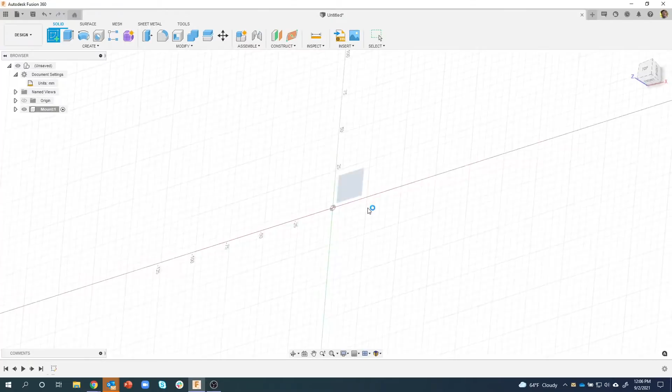Okay, so I'm going to start making sure I'm in millimeters, and like you should always do, I would recommend creating components. So I'm going to say new component, and I'm just going to call this one mount. So now I have an active component. That allows me to create a sketch, and I'm going to show some tips and tricks as we go through that might speed up and save some time for you.

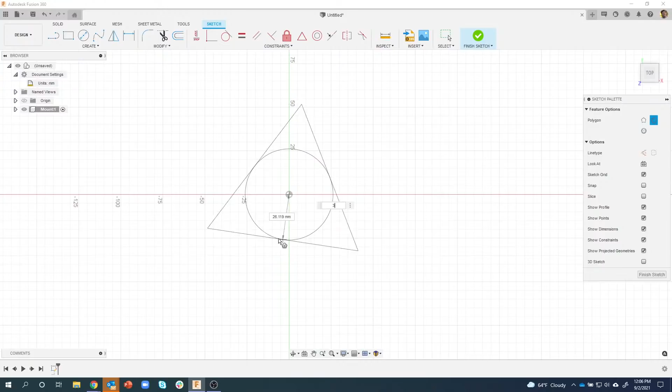So I need to create a polygon or a hexagon. You can see right here, polygon, circumscribed polygon. I'm going to go ahead and click right here in the center. You can see this number 6 right here. It allows you to specify the number of sides. For example, here's a triangle, but I'll put it back to 6. And I'm going to get the top line sort of horizontal, but not quite.

But what I do care about is the overall radius of this. So I'm going to say I want that to be 25. I'll hit enter. Now you'll notice it is not fully constrained, but as soon as I come in here and say let's make that a horizontal line, it is now fully constrained. Okay, so here's one of the tips.

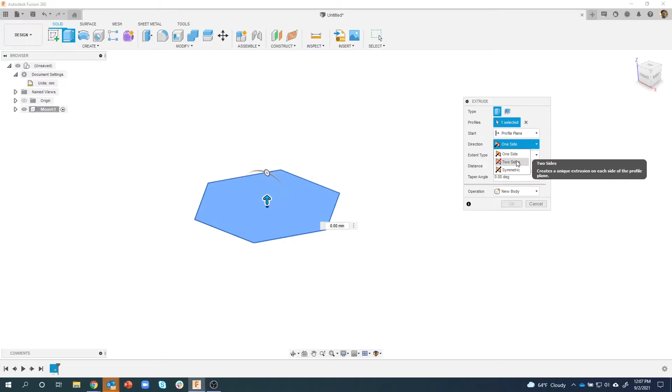I'm going to extrude in 2 different directions. I'll move this in case some of the video stuff is covering it up. By default, it's usually set to one side. I'm going to come in here and say 2 sides. And what this allows me to do is I can drag down, for example, and we can see that distance right there. And then I can also drag up.

Now, why am I doing this? Well, it's going to keep my origin where this blue plane is. And that's going to make it much easier when I go to create the profiles for the metal inserts. So I want to go down 5 millimeters, and I want to go up, I think, around 28 millimeters.

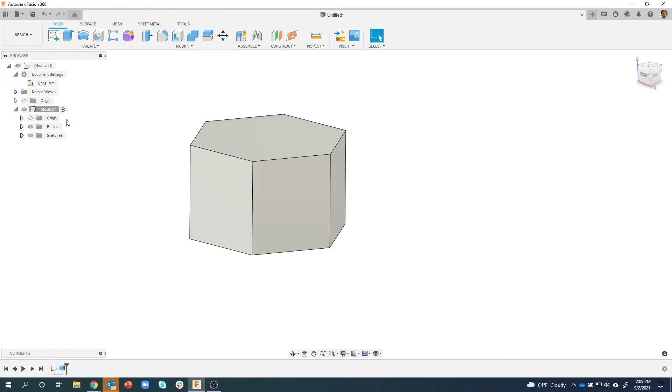And you might be thinking, how would you go about creating these little standoffs or these little arms? Okay, so using the cube kind of as reference, I want to create a sketch on this front face. So I'll pre-select it, create my sketch, zoom up here just a little bit, and here you can kind of see why I did that extrude in two different directions. Notice where my origin is, and we're basically going to create all of the stuff above this, and I have enough material down here for the stability of the part.

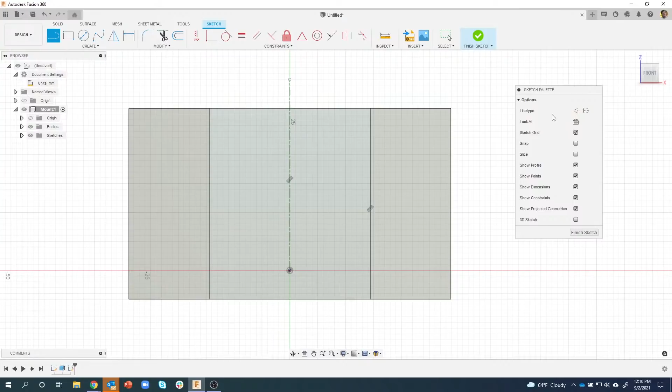So I'm going to create a line, and hopefully you all know this. We recently added a new line type in here called center line. So I'm going to do center line. I'm just going to click at the origin and drag straight up, like so. Then I might create another line, but this time I'm going to do just a construction line that goes across. That way I can kind of reference that line if necessary.

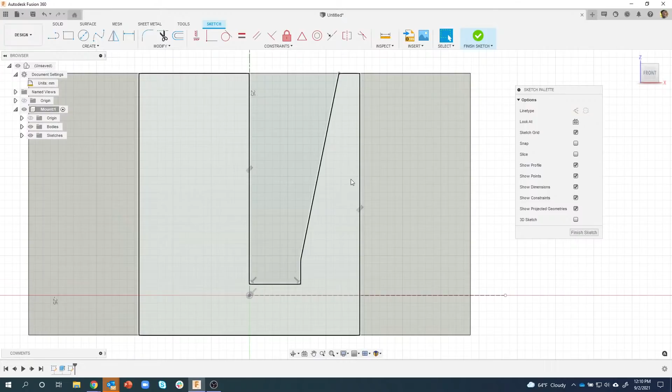Then I'm just going to kind of mock up what the groove is supposed to look like. And again in the outline, oops, and I want to make sure I'm in the regular line, I give like the shape of the profile, and that's kind of what I'm following here. It's just something that kind of looks like that. This is kind of the opening. Then I'm going to start to create the dimensions for this to tie it down, because right now you can see that it is not fully constrained.

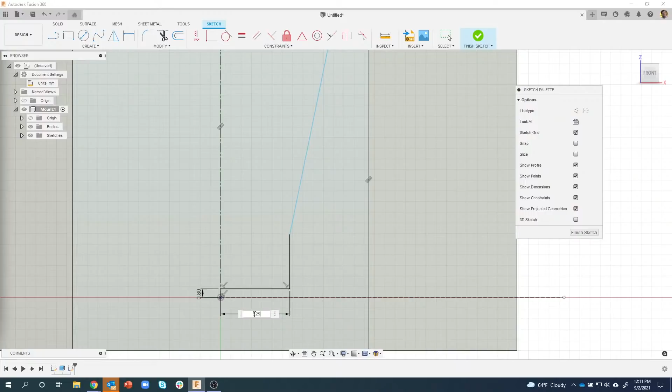So I'll throw a dimension maybe here, and that's supposed to be 3. Maybe I'll throw a dimension from here to here, and that is supposed to be 0.8, I think. I need to throw my glasses on here. I'm looking at my outline real quick. Yeah, 0.8. And you can see as I'm starting to do these dimensions, it starts to constrain the sketch. So 6.25. And then finally this little length right here is going to be 2.4. And again, these are millimeters, so they're fairly small measurements.

So I get that particular shape, and you can kind of see that's, let me line things up, that's kind of that angle right there, and then the vertical line going up and down. Okay, so that's kind of what we just created. Then I'm also going to use this sketch to create the slot for the metal that's going to be slid into here or held into here. Actually I think I'll get to that in just a second. I'm going to draw a profile here.

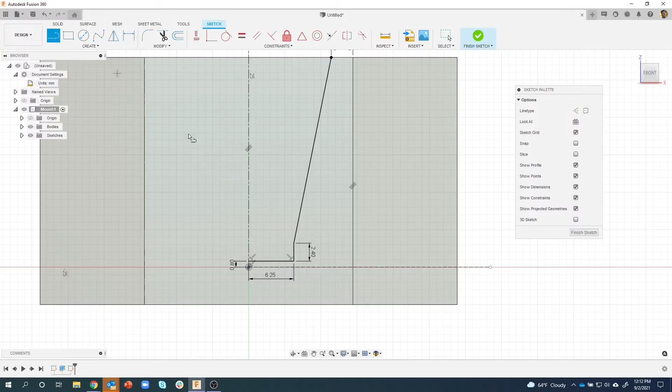And here's a cool tip. So notice I have these dimensions here, and I also have these constraints. I can come over here and turn off show dimensions and show constraints, and it kind of cleans up what this is going to look like. So it's not so cluttered as when I had all this stuff on here. And we'll come back to that here in a second.

But now I'm going to draw another profile, just kind of mocking it up. So I'll come over here, draw vertically a little bit, kind of come at some weird angle. Again, just kind of guesstimating what this is going to look like. Let me purposely make some changes here. I'll do that, and I'll do something like that. Okay, so you can see some of it is constrained and some of it is not.

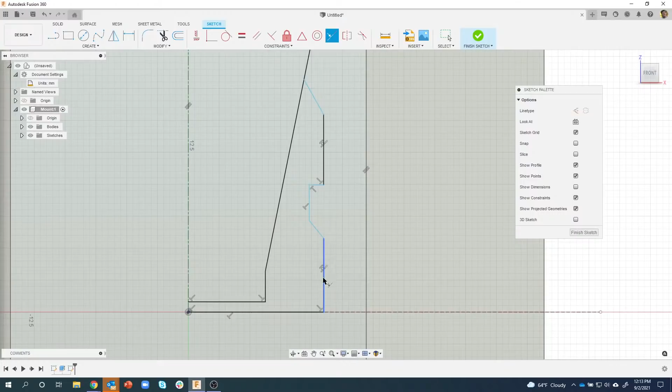What I'm going to do now is use dimensions and constraints. So I want these two lines, this line here and this line here, to be lined up with each other. So I'm going to make those collinear. So I'm going to say that line and that line need to be collinear with each other. I want this line and this line to be parallel with each other, so they're pointing in the same direction.

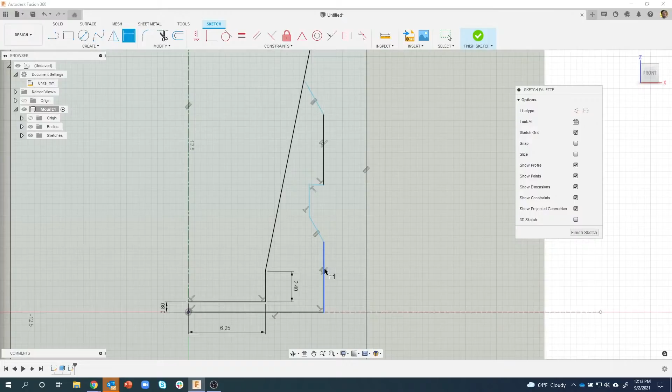And then I can tie down with some dimensions. So I'll go ahead and hit the show dimensions again here real quick. Type in some of these dimensions. So let me go ahead and type in like 3.5 for this guy, and you can see how that changes slightly. We'll do dimension 1.2. I'll make this angle 135.

So I'm just kind of tying down everything, fully constraining it, so you can see how that updated that one there. We'll make this 0.4. So the only thing that's left is this blue line right here. And again, here's a tip. If you don't know why it's unconstrained, I just click and drag and I can see, oh, it doesn't know the height of that line, because I can move that line up and down.

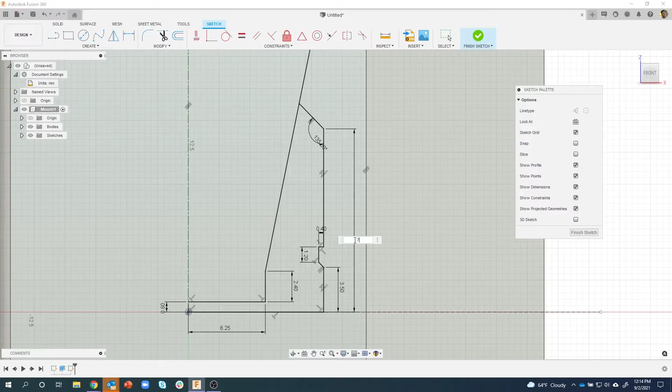So let's throw a dimension from maybe here down to the very bottom, and we'll make that 7 millimeters in this case. So now we've tied a bunch of this down. I'm going to go ahead and make sure that looks good. That looks good. Okay. I want to add one more dimension. I'm going to go from here to here and do 1.2. Okay, there we go. That looks a little bit more like what I was looking for.

But notice how crowded and complicated that whole thing looks. And this is where I turn these guys on and off. They didn't go away, they're just hidden. And I can see this profile much better than when it looks like that. So hopefully you guys know that tip.

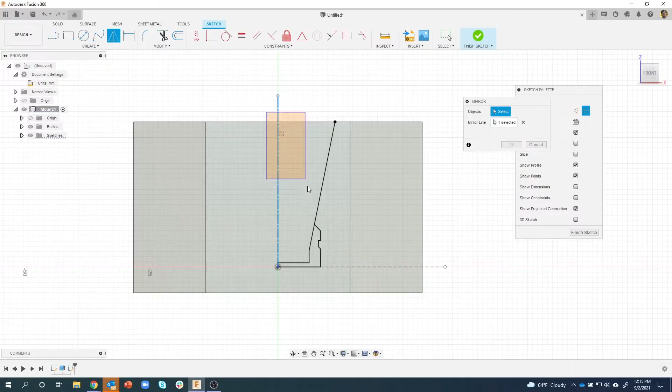Now I want to mirror this to the other side, and this is one of those tips that I did earlier. I created this as a center line, so watch what happens when I do my mirror. Notice it says mirror line 1 selected. It automatically selected that for me, so all I have to do is draw a box around what I want to mirror, and that's that geometry right there, and I'll say OK. And it automatically mirrored for me. If this was a construction line, I would have had to say, this is my mirror line.

Okay. Looks like I have somebody helping out on chat. I really appreciate that. Hopefully it's Jason. So if you have any questions, whoever's on chat will hopefully help you out. So thank you. Okay.

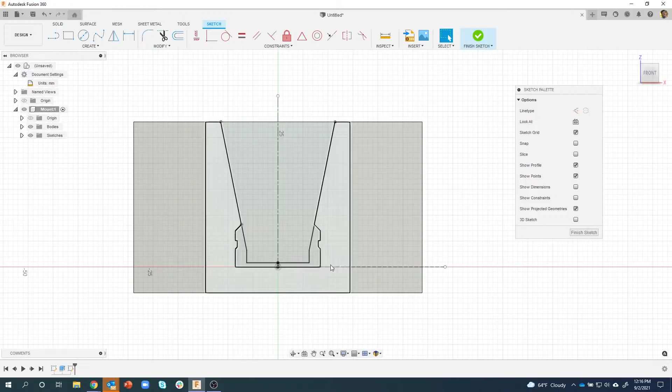So Stuart asked a question I just glanced over. Why was the profile black? Yep, it is Jason. Woohoo, yay. Why is the profile black before I added that last dimension? I'm not going to undo, but it was because of this line down here. It wasn't fully constrained. I hadn't given that a dimension yet, but because this line was on top of it, it looked black. So once I put this dimension in here, this 1.2, that's when it fully constrained the sketch.

And if I take a look, let me go finish sketch. And now I have this profile, and I could have done it as 2 separate sketches, but because it's on the same face, I created it as one single sketch. So I'm going to select the profiles that I want to extrude. So I'm going to grab these, right click, and it shows me the command that makes sense.

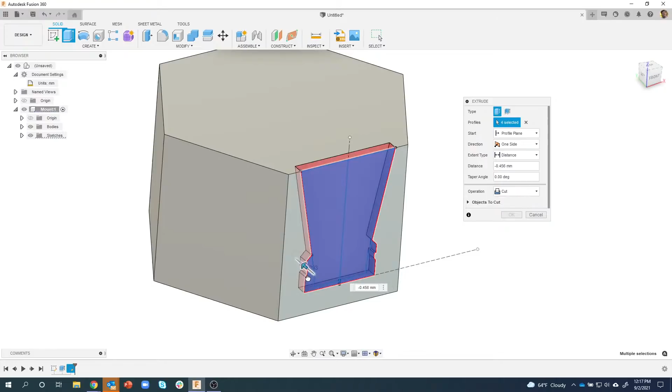So I'll say extrude. We'll drag backwards a little bit to give it the direction that we want. And then I can specify how far. In this case, I can see it's a negative number, so I'm going to type in minus 10 millimeters. I'll say OK. And we've created this particular shape.

Well, I want to reuse my sketch, and by default, it gets turned off, which is a preference. You can go into your preferences and say, do not turn off my sketches, but it just helps clean things up. Typically you're only using a sketch once, so that's why we have it set that way by default, but I can always come back and turn that sketch back on.

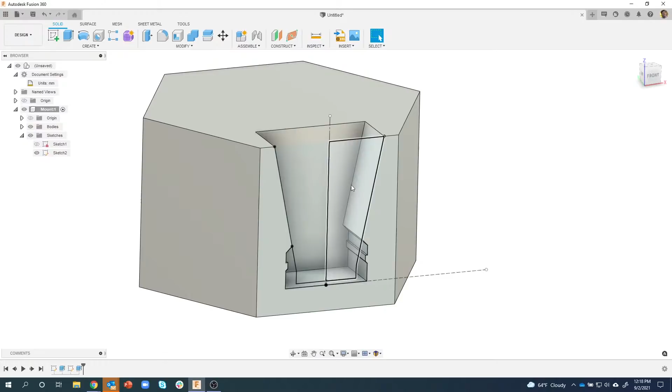Now I want to remove a lot more material, so there's a lot of room. So I'm going to come in here and grab these profiles again, just these two, right mouse click and say extrude.

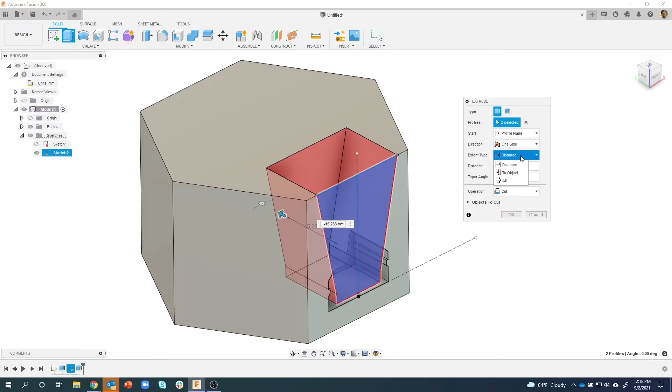Now I want it to go exactly halfway into the model, or basically to the center, but I don't have a point there. But check this out. Instead of distance, I can come in here and say to object. And usually when we say to object, we're clicking on a face of a single part or another part, but I can actually come over here and click on this point, and it's going to extrude back to that point. So you can kind of see how that's lined up.

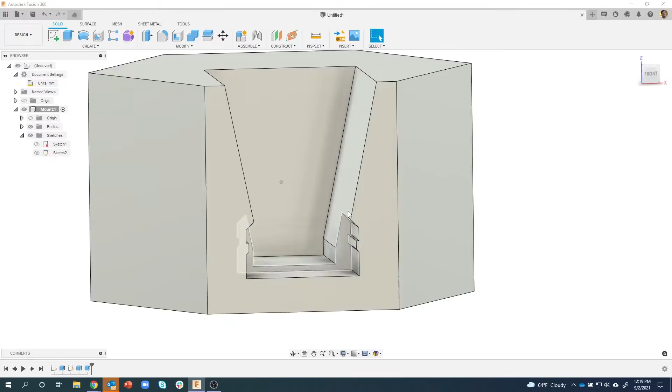So I'm basically specifying that as my distance. So it's always going to go to the center of this hexagon. And I'll say okay. I'll turn my sketch off just to keep things looking nice. And there, in basically 2 sketches, I now have an area for the metal to slide in and stop against, and then I have this big void.

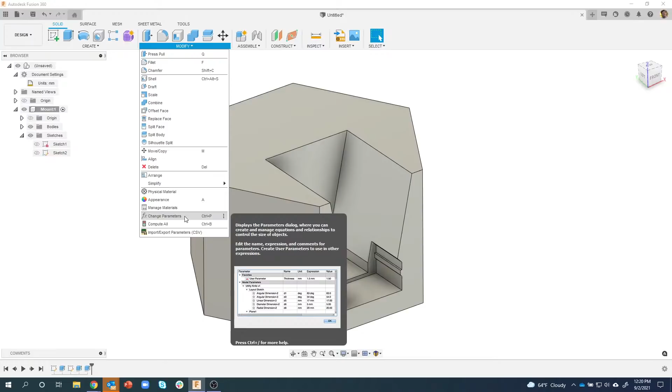Okay, here is where some forward thinking comes in. So in this example here, it has 6 arms. Well, what if I wanted it to have 3 arms or 4 arms or something like that? Well, this is where I'm going to create a variable or a parameter. So I'm going to come in here and say change parameters. And what this is showing me is right now I have model parameters, and that's it.

If I expand this open, let's just do this first extrude. We can see those 2 distances that I specified, the 28 and the 5. I could expand open these sketches and see all the dimensions of these sketches. But what I'm going to do is actually create what's called a user parameter. So I'm going to come in here and let's call this number of slots.

Now it's not a measurement, it's a number. So I'm going to come in here and say no unit. And I'm just going to scroll through here so you can see we've got a ton of different units in here. So angles, currency, mass, percentage. There's just a ton in here that you could use. But I'm going to say no unit, and let's default to 6. And I'll say OK. And I now have a user parameter.

In fact, I could say this is one of my favorites. I'm going to click on that little star, and you can see it puts it up in my favorites. So when we go to do a pattern, for example, we're going to reference that. So this is where the magic happens. Instead of having to type in or change whatever, I'm going to come in here and do create pattern, circular pattern.

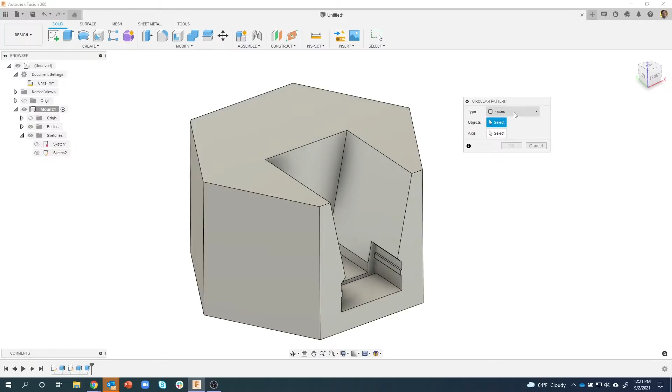Now, by default, it says faces. Please don't do that. Think about how many faces I would have to manually select. Instead, I'm going to go to features. What are the features? Well, I want that first extrude that I did, and then I'm also going to select that second extrude. And so you can see it selected all of the faces of those 2 extrudes. I'm going to turn my origin on just so I can see that real quick. It's kind of hidden back in there.

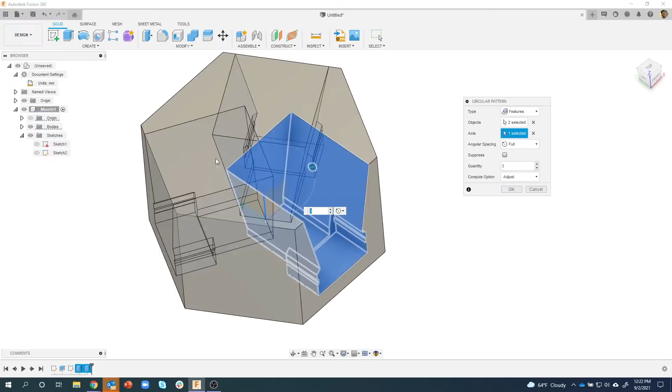What's the axis? I'll go ahead and click on that vertical axis. And you can see it gives me a preview of what that would look like. Now this is an enhancement that was put into the product fairly recently. The previews used to be 1 or 2 faces showing you what it's going to look like. Well, now we do this really cool wireframe preview. I absolutely love it. So I'm really excited about that update.

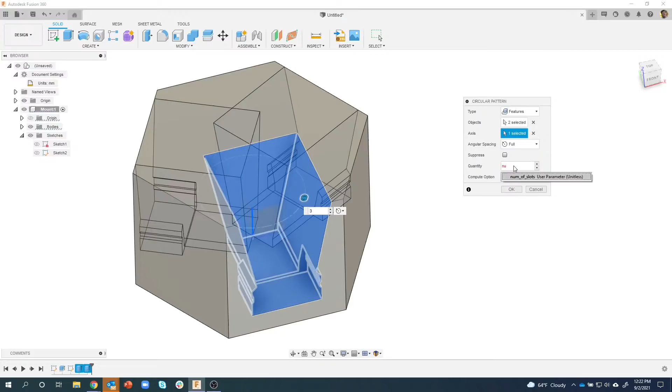Okay, so we want it to go all the way around, and notice the quantity says 3. Well, instead of typing in 6 or 4, I'm going to type in number of slots. And notice as soon as I start typing in the letters, it finds that user parameter. So I'm going to go ahead and click on there. We can see that that's a parameter, and the preview updates. I'm going to change the compute option to adjust and say OK, and notice the result that we get.

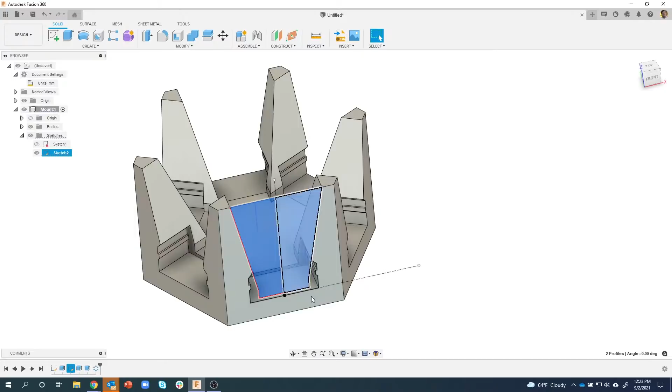Now I'm going to undo just so you can see what happens, but literally in just a couple extrudes and a pattern, we created this shape. So we used a pretty large profile here to extrude into the middle, and because we patterned that around, it basically removed all of that geometry.

Okay, the next thing I want to do is put some fillets on here. So I'm going to select an edge, say fillet, and let's just go ahead. I'm going to do both of these fillets here, and I want those to be fairly small. I think 1 millimeter, so you can kind of see how that's rounded over.

And since I'm working on kind of the same arms, I'm going to go ahead and add a selection set. So I'm going to click on that little plus. It's going to allow me to select 2 other edges, or multiple edges, I should say. And let's make these a little bit larger. Let's make these 5 in this case, so we can kind of see what we've done there.

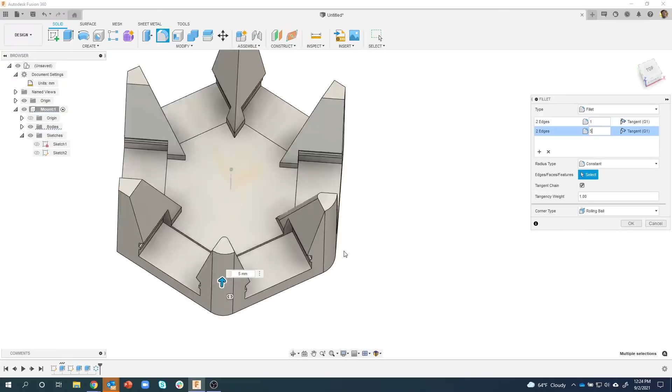Now, I could have clicked on all of these edges all the way around. That's totally valid. But I'm curious, can we do another pattern of just the fillets? So let's try that. I'm going to do a circular pattern. Again, making sure it says features. And I'm going to select just this fillet feature right here. What's the axis? We'll do that same axis.

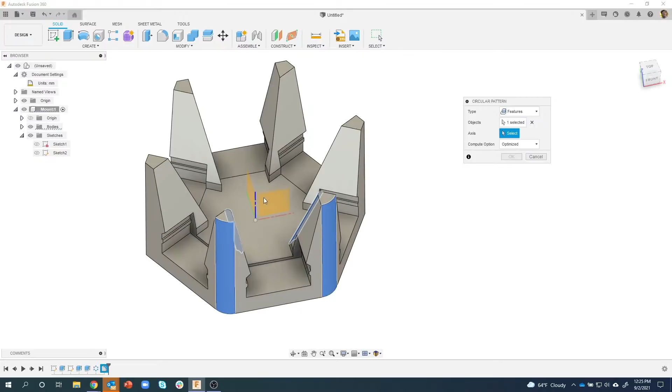Instead of the quantity, I'm going to do my parameter, the number of slots. Gives me a nice preview of what that's going to look like. Make sure that says optimized, and I'll say OK. And it's going to pattern those fillets all the way around. So instead of me having to manually click and select those edges.

Now, why did I do the parameter? Well, check this out. I'm going to go into change parameters. I'll move this a little bit smaller so you can see. Here's my user parameter. So let's say instead of 6, I want to do 4. I'll click somewhere here. And notice the result I got. Now, I did get a little bit of a warning, and we'll explain that here in a second.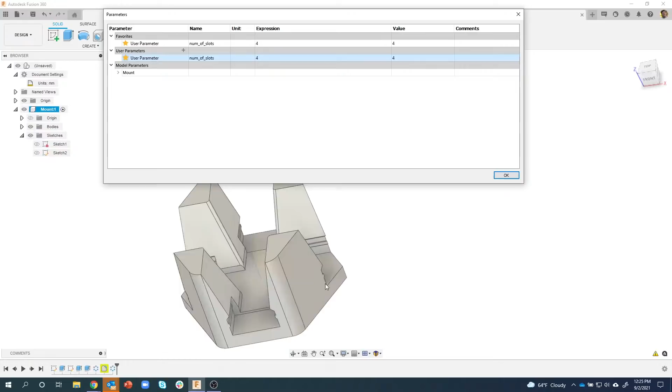But I now have 4 slots. And the fillets still go all the way around. But you'll notice, for example, it didn't do this edge and that edge there. And that's why it gave me the little warning right there, because that geometry really didn't exist previously. But notice it did a pretty darn good job. It did all of those.

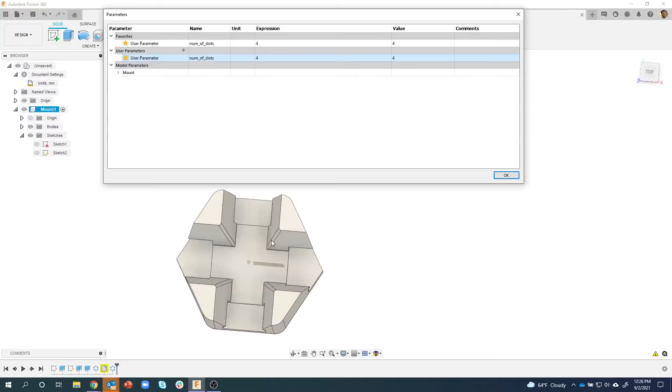I could even come in here and do, for example, 3. And I get the internal fillets and the external fillets also, and I now have 3 slots. So very quickly I could come in and make changes to this, and it's going to drive what it's going to look like on the model.

I think parameters are kind of underutilized. I would highly recommend playing around with them and trying different things. How could I speed up something? For example, if I were creating a bookcase, I would create a parameter called plywood, and let's just say it's 0.75. Then whenever I create a dado or I'm doing an extrusion of the plywood, I would just type in ply, and then my dados are going to be 0.75, the plywood's going to be 0.75,

and then let's say I go and I buy the wood and I bring it back, but when I measure it, it's 0.77 instead of 0.75. All I'd have to do is go in and say plywood is now 0.77, whoosh, everything updates. Extremely powerful.

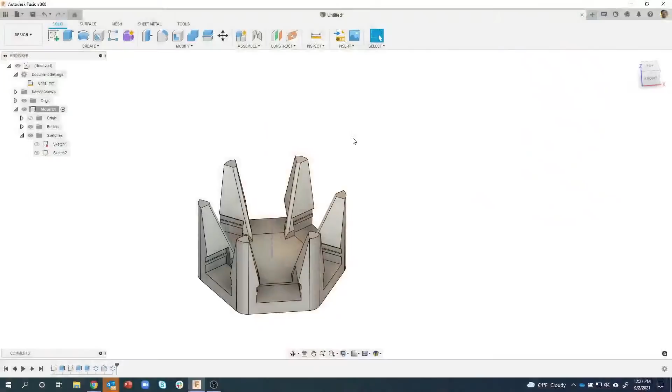Okay, so we are done with this mount, believe it or not. It was literally that quick to create this. So I'm going to go ahead and save this. I'm just going to call it mount. Say OK.

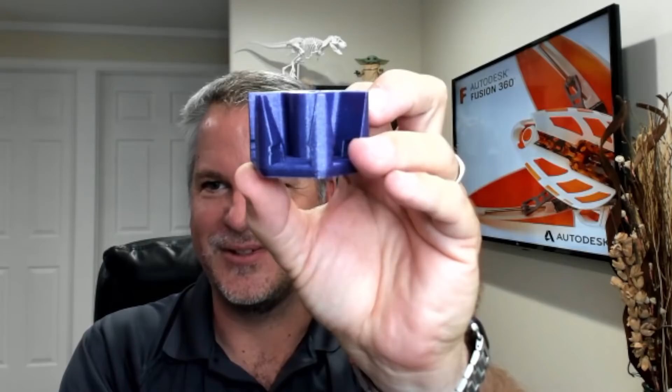Now what I want to do is start to create the other shape, which is this. Let me change my camera here real quick. That's this one here. So we can see it has some of those arms, those little slots, but instead it's got this area here that you can use to hang it on the wall. So you put it on a nail and then it hangs down on the wall.

So I'm going to use a command called Derive. So under the Create menu, you'll see this little icon, Derive. I'll go ahead and click on it. I'm going to move this menu.

So when you click on Derive, you get this menu here, and you'll notice a lot of options. So I'm going to just kind of highlight here. So destination, new design, or existing design. Well, this right here is our design. I'm basically going to say new design because I want to kind of work in it in a total new design, so I'm going to leave it there.

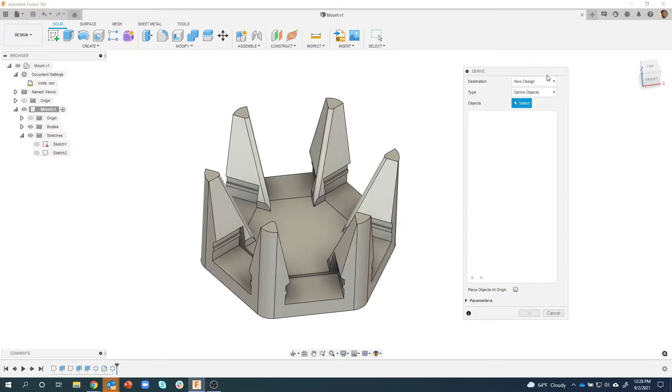And then we have the option to derive objects or derive the component. Now I'll talk about this derive objects a little bit more later, but you can derive individual things, even sketches, for example. So that's where I would use derive objects. I'm going to say let's derive the component. I'm going to do this top level mount right here. So you can see it put it in here, and if I expand that open, it's going to derive the bodies, and it's going to derive the sketches that were used.

Okay. Then down here there's parameters. Oh, and by the way, I could derive multiple parts if I needed to. But here, parameters. I want to keep the favorites, and I'm going to grab the parameters from the components. Now we're going to talk about this a little bit more later. I'll go ahead and say OK, and watch what happens. I now have a new session that I'm working in. It's untitled. It looks exactly like this original mount over here.

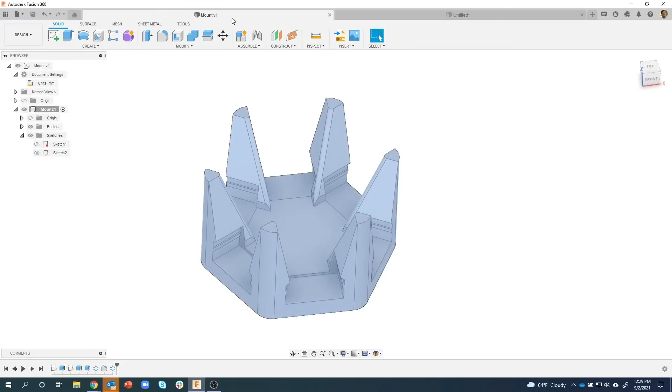Okay. Now there's some pros and cons with Derive. Sorry, let me show you the timeline. Notice I have one feature, and it says derived from mount. So you can kind of think of a derived part as the first part is kind of the master. If you make a change to that, that change is going to roll down to your derived part. So we can make changes to the derived part, but we can't say, okay, make this 3 arms or make it 10 arms or anything like that. You're going to see that. I'm going to show that here in just an example.

So you can think of a derived part as almost like a casting. So you've designed this model, it's got fillets and stuff like that. Then you derive that, and you can do some machining, like we're going to flatten this top face, we're going to drill a hole, etc. If you went back to the casting and made a change to that, your derived part is also going to change. And that's kind of the benefit of the derive functionality.

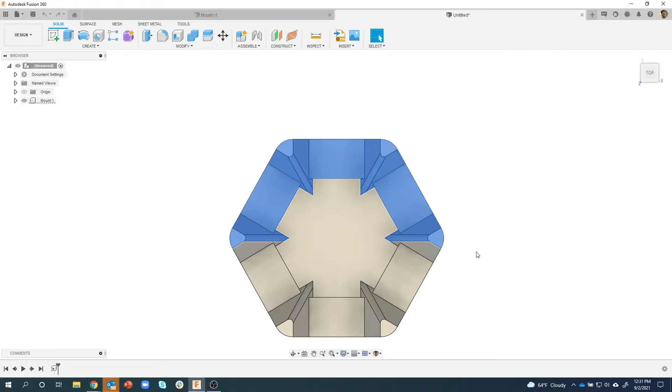So here's this new one here, and I want to change it. As you can see, I don't have the history tree or the timeline for going back and making changes because it's based off that derived model. But I can use functionality like direct editing or something like that. So I'm just going to draw a box kind of like so, and it's going to select all of this stuff. Now there's some things I don't want to get rid of, so I'm going to unselect, for example, these faces.

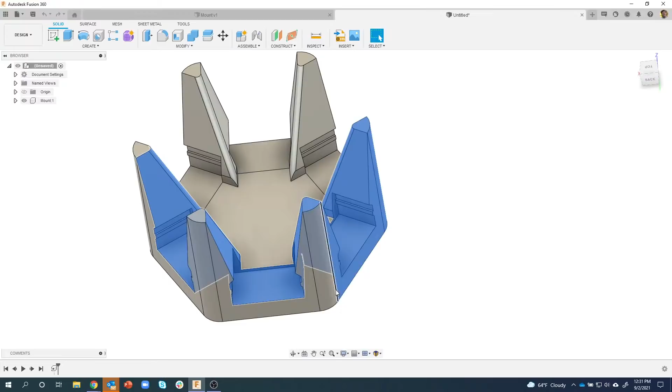Now why do that? Well, instead of me manually clicking every single face, I created a fairly large selection set, and then I'm just removing the few features that I want to keep. So you can kind of see I basically just drew a big box around the whole thing, selected a bunch of faces, and then I'm saying keep this outside profile, keep these little arms. Now when I come in here and say delete, you'll see whoosh, it healed that geometry, and I still have these 3 slots right here.

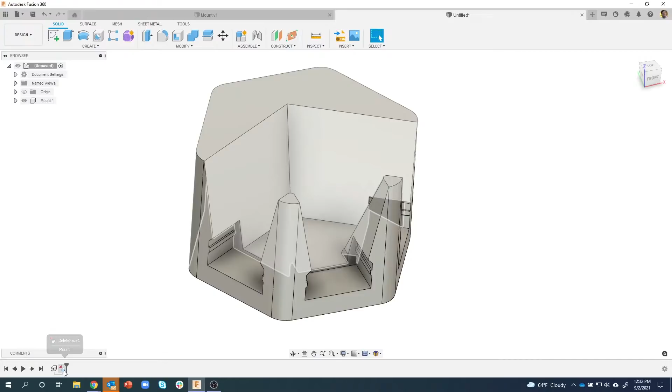And this is based off the original mount, and you're going to see an example of that here in a second. Notice it's also capturing what I did in the timeline. So everything I do now is being captured. Okay. I want to add some geometry on here, so I'm going to just create a quick sketch. And I want to basically have a rounded section right here for the keyhole. I could draw a circle, but these faces are angled, which adds a little bit of complexity to this. So check out, I'm just going to do something like this.

So you can kind of see I'm going to create a line, get near this edge, it's going to be coincident with that edge. And then I'm just going to do the same thing. I'm just going to sort of mock this up. I'm going to get near this edge right here. It's going to be coincident with that edge. Well, I want those to be perfectly lined up, so I'm going to do a midpoint constraint. I'm going to say that point is on the middle of that line, and you can see how it moved it over. Same thing here.

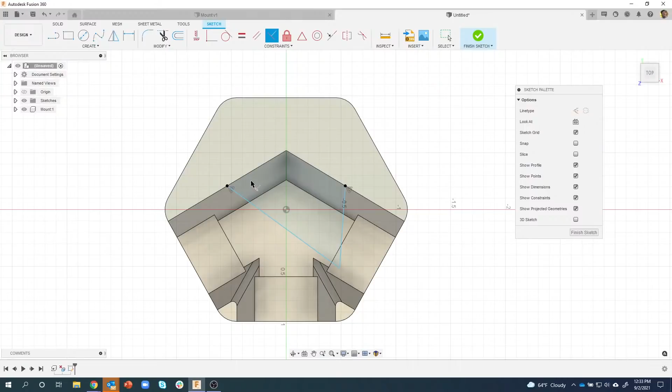That point is on the middle of that line, and you can see how it kind of moved that whole point over. So I'm starting to tie down my sketch here. And then I want these to come off at exactly 90 degrees. So I'll say perpendicular. I want that line and that line to be perpendicular with each other. That line and that line to be perpendicular with each other. And now you can see I have this perfect triangle here.

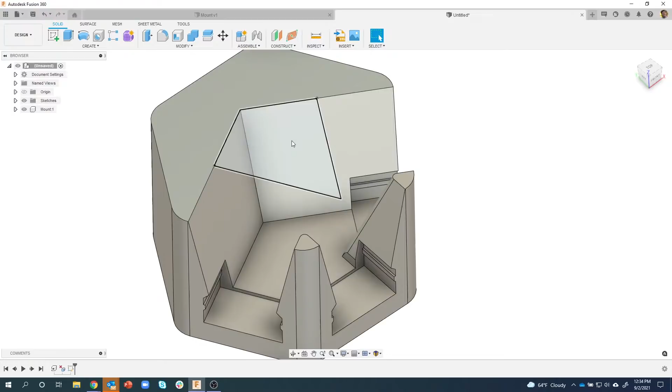And notice it's going back to this back edge. That's kind of important here. Now, could I put my fillet on here as a sketch? I absolutely could, but I like to do things in 3D instead of 2D. I like to keep my sketches simple. So I'm going to grab my profile and say extrude.

Now if I start to drag, you're going to see it's going to want to cut or remove this geometry. Well, I don't want it to cut, I want to join. So now it's going to add that geometry. And because this wall's tapered, it doesn't matter, because it's going to always stay touching that wall. And instead of a distance, I'm going to say let's go to a particular object, which is the floor right here. And I get that result. And it's joined like so.

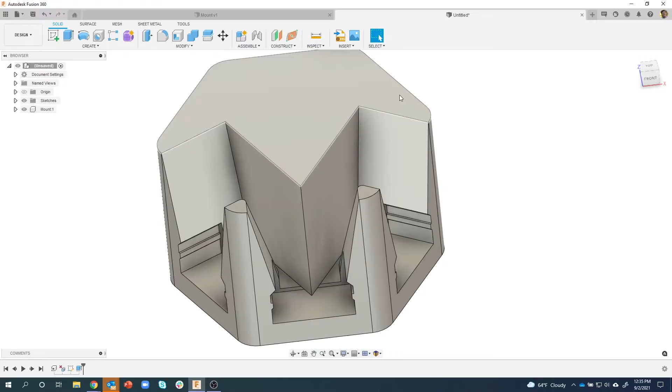And then all I need to do is add in the fillet or fillets that I want. So I'll click this front edge, and notice it's like overhanging and all that kind of stuff. This is what blows me away with Fusion, just how powerful it is. I'm going to start to drag, and you're going to see it's going to allow me to create that fillet, even though it was kind of overhanging this other edge there. And now we're bringing that point back.

So in this one here, notice an issue. 0.199 inches, but this one was millimeters. Well, my default units are inches, and so when it created a new session, it defaulted to the default units, which was inches. But I'm about ready to type in my measurement. I don't want to switch right now because it would cancel out of my fillet command.

So instead, I'm going to come in here and type in 8. And notice if I type in 8, it's going to do 8 inches. But if I type in mm right next to it, it's going to do an 8 millimeter fillet, even though I'm in inches. So you can always type in different units if necessary.

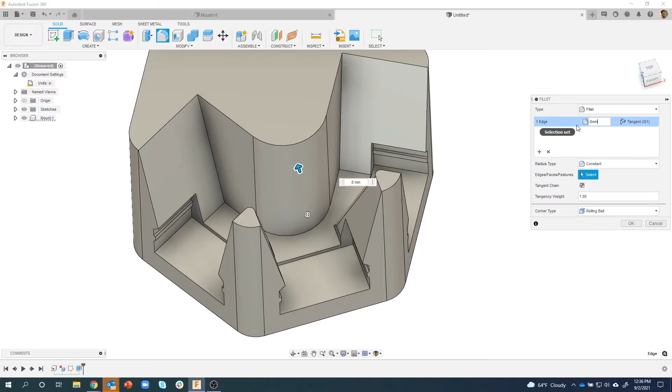I also want to fillet these two edges here. So I'm going to do a selection set, kind of keep my fillets all together. So I'm going to say let's do that edge and that edge, and I want these to be 3 mm, and so you can kind of see what that's going to look like. So hopefully that's a new tip, if you didn't know that already, you can type in different units even though you're in a totally different unit there.

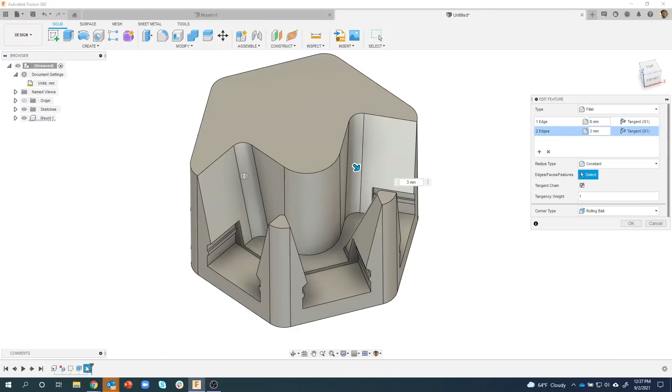So I'm going to go ahead and say OK, and I'll come in and say, you know what, I do want to be in millimeters. I'll say OK. And those fillets are still correct. If I edit those, you can still see 8 and 3.

So I'm going to rotate to the back here, pre-select this face, right mouse click, and it shows me the commands that make sense. Well, one of them is shell. So I'm going to go ahead and click on shell, and notice what happened. Well, tangent chain is turned on.

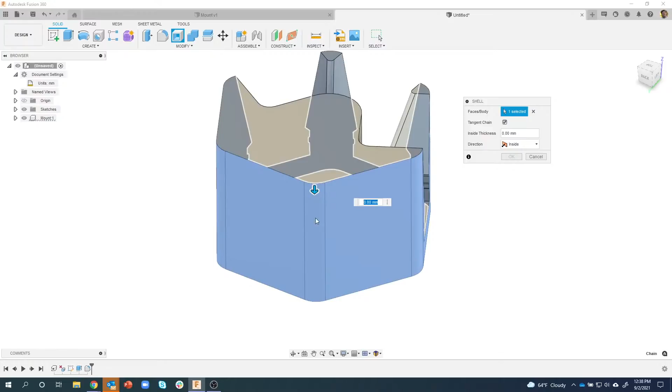So I selected this face, and with tangent chain turned on, it's going to say, is there any other face tangent to it? Well, yes, this fillet is. Are there any faces tangent to that? Well, yes, this flat face. So I'm going to turn that off, but nothing really changed. So I'm going to clear my selection and then click on that face. And now you'll notice with tangent chain turned off, it does not go all the way around.

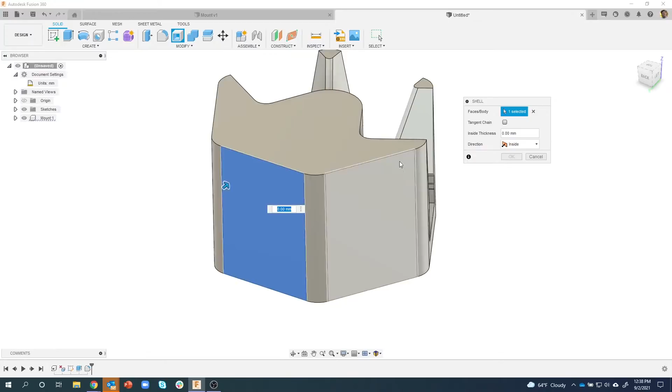I want to have a fairly thick, I'm going to say like 4 millimeters. So I type in 4, and you can see it's going to shell to the inside. Now here's a tip. Because I did these fillets, those are going to carry over into the shell. So I usually make sure I have my fillets done before I do my shell.

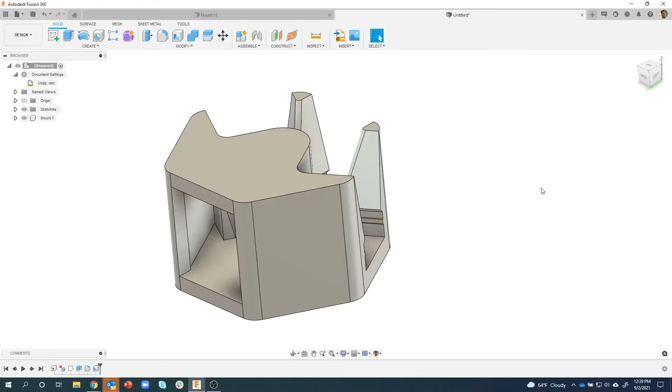In fact, shell is one of the later downstream commands that I do. I usually have my part looking the way I want, and then I'll finally do the shell. That way I have even wall thickness all the way through. And I'll say OK, and we've just created that hollow part. So the last thing is to create that keyhole.

And if you kind of look at the shape there, it sort of looks like a slot with a larger hole. Now there's probably multiple ways we can go about creating that, but let me go ahead and create a sketch on this face, and I'm going to use the slot command. And I'll just do a center to center slot.

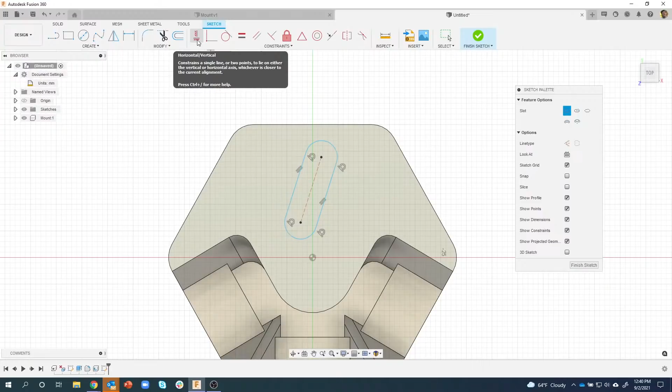Now I'm going to purposely draw it at a weird angle. I'm not worrying about the size of it right now. I'm just throwing it on the screen. Now, why did I do it at such a weird angle? Me personally, I like to add the constraints and see the change happen. So obviously I'm going to come in here and say I want that to be vertical. It's going to make that line vertical, and I can see that physically happen.

First thing I'm going to do, though, is make sure this is the right size. And notice when I click on dimension, it's doing a radius. Well, I want to specify the diameter of the slot. So I'm going to right mouse click, and notice there's a pull down for diameter. I can specify, is it a radius or is it diameter? So I'll click on diameter, place my dimension, and I want this to be 4 millimeters, and we'll see that that instantly updated.

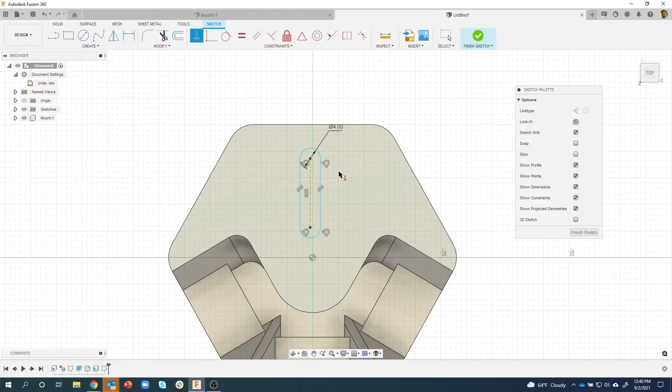Then, like I said, I'll come in here and say horizontal vertical. I'll click on that line there, and I can see that it turned vertical, but I can also see that it's not perfectly lined up with the origin. So I want to make sure that this point and this point are horizontally lined up with each other. So I just constrained that, and you can see some of this is starting to turn from blue to black, meaning that it's constrained.

Okay, then I'm going to tie down the dimensions. So for the length of the slot, I want this to be 12. And then for the position of it, I want it to be a certain location from there. And let's make that 6 millimeters. And now we can see that that is fully constrained.

But what about the larger part for the screw head to go through? Well, I'm going to do something kind of different. Some people might say, well, I would just draw a bigger circle right here. Well, I'm going to delete these two tangent constraints, like so. And now you'll notice, obviously, things have changed. It's no longer fully constrained because we removed some of those constraints.

And then I'm going to add a dimension to this bottom arc. Again, I want it to be a diameter, so I'm going to switch to diameter. Let's just place it maybe down here, and instead of 4, I want this to be 9. Now, I got kind of an interesting result here. You'll notice that arc right there. I'm going to grab this point, and you can see if I move that around what is happening to my sketch.

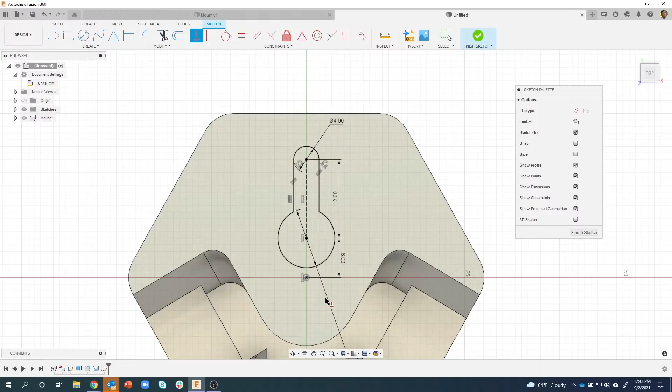I'll do the same thing here, like so. And then I'll finally come in and say, I want this to be vertical. And there we go. My dimension moved off here a little bit. I made this a 9 diameter arc. And then I had to manually drag that arc to define the shape, and then finally finished constraining it with a vertical constraint.

Now I could have just left the slot as it was and drawn a 9mm circle, but then I would have to do some trimming, or I'd have overlapping loops or whatever.

I think this looks a little bit cleaner. So I'm going to go ahead and finish my sketch. We'll use this as the profile. Extrude. I'm going to kind of turn to the back side here. How far do I want it to extrude?

I'm going to say to object, click on that face there, because I always want that keyhole to go all the way through. So if I were to change my shell to 5mm, this is still always going to go through because it's going to go to that face there. If I had just typed in a distance of 4mm, because that's what the wall thickness was, if I were to make a change, it would not go all the way through. So kind of keep that in mind.

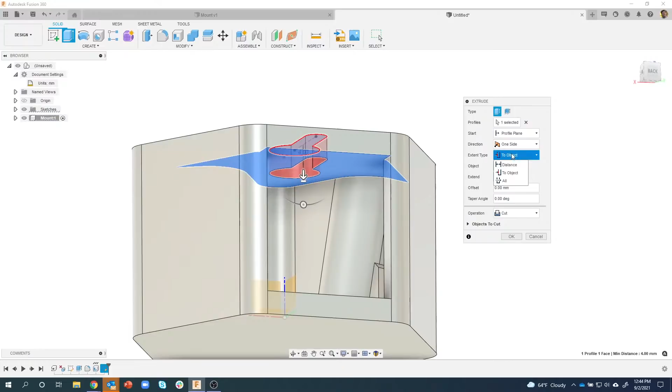I'm going to admit, back in the day, I used to always do distance, or I would always click on the face. And it wasn't until some people pointed out, you should go to to object, and it's always going to reference that face. So I use to object a lot now. So I'm going to go ahead and say OK. And there we go. We are done with this part. So I'm going to save this, and I'm going to call this mount with keyhole.

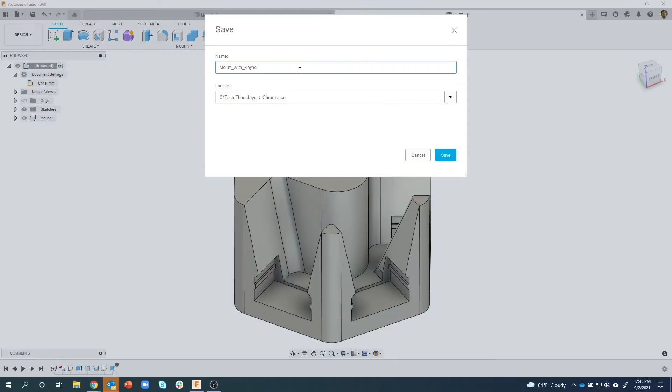And if we look at my project here, you can see there's the mount, and there's the mount with the keyhole. So where does this derive come into play? So check this out. I'm going to come back to here, and as I'm looking at this, I'm like, you know what? I want to add some character, because this face is going to be the visible face. In fact, this is kind of how it sits on the wall. These little faces here sit against the wall. The metal and the LEDs are kind of away from the wall, so it kind of casts a bigger glow. That's kind of the design.

So I want to maybe round over, or maybe even chamfer, because I'm going to be 3D printing this. Chamfers 3D print better than fillets. And I learned that from Jason's last live stream. So if you didn't watch his last live stream, make sure you watch it. He had some really cool tips on 3D printing.

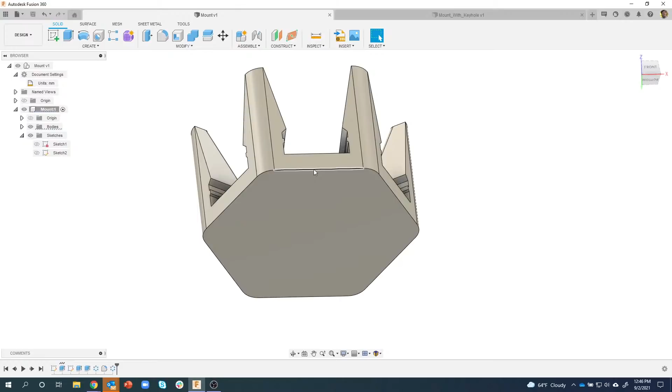So I'm going to select that edge and hit chamfer. And let's do maybe like a 2mm chamfer. Actually, that looks pretty cool. That might even catch some light and stuff like that and reflect it. I'm going to save this. I'll go ahead and hit save. I can even say added 2mm chamfer.

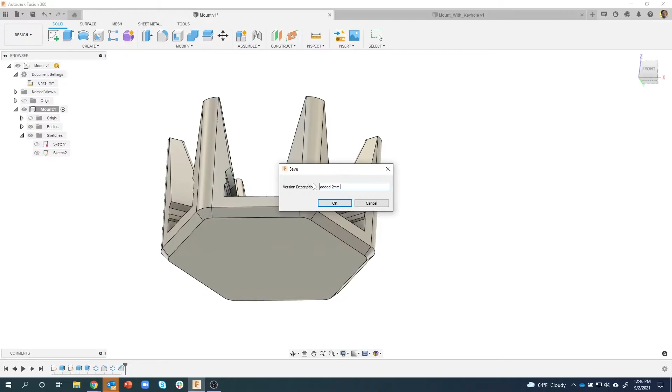Now I'm going to go back to this mount over here. And notice no chamfer. But also notice in the timeline and up here at the top, it says one component is out of date. Click here to update it. So I'm just going to click on that little icon. And there is the chamfer that came from the original model. So it kept all of my changes that I did, but it was able to add that on there. And that's kind of the idea of Derive.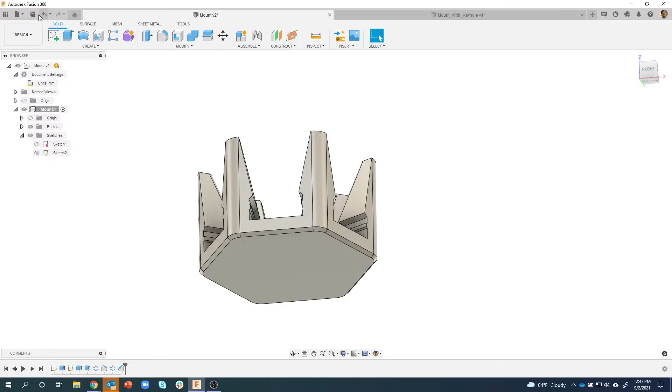You start with a model like this. If you come back and make some slight changes to it, so we say that's too big, let's make that 1. I save that. It is always going to communicate with the derived file and say, hey, that's out of date. I click on it, and it will update to that smaller chamfer.

So this is kind of a cool example, I thought, where I have a part, they're sort of similar. I was able to reuse that existing model instead of starting from scratch and drawing a bunch of sketches. I just kind of deleted some features and then added the new features that I wanted, and it captured those new features in the timeline. Here's all those steps.

I know we're kind of running short on time here. Here's another quick example. I can actually create a sketch and derive a sketch. So I'm just going to do a really basic one here. I'll just do a circle and maybe some kind of a rectangle. Okay, so I'll just do something like that. I'll finish that sketch.

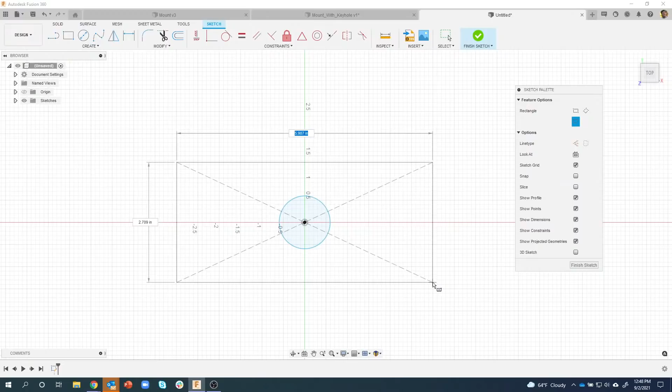And I'm going to say create a derive. So notice when I do that, it says it requires a saved source. So I'm going to click on save and continue. And I'm going to call this main sketch, like so. It's going to save it into my project.

What do I want to capture? So this time I'm going to say derive objects. And I'll go ahead and grab this sketch right here. And it could be multiple sketches. So you can kind of think of this almost like a template sketch. So I'm going to go ahead and say OK. And now it's in this new design.

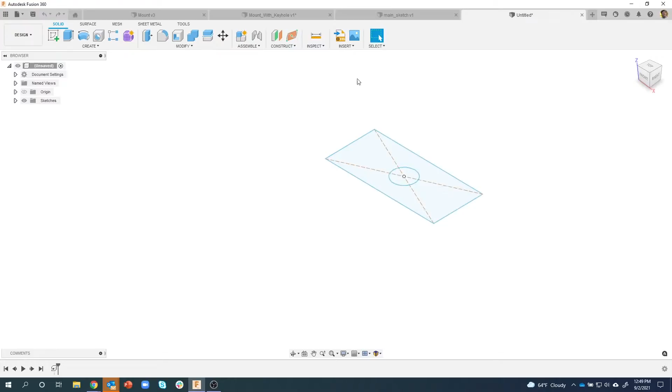And let's say, for example, I already had some existing geometry. Let's just say a big box like so. I'll just do something like that, for example. So here's that sketch. And I'm going to use this sketch. I'll go ahead and extrude that down into the part, whatever distance, minus 0.5. Okay, and we'll save this guy, and I'll call this cool block.

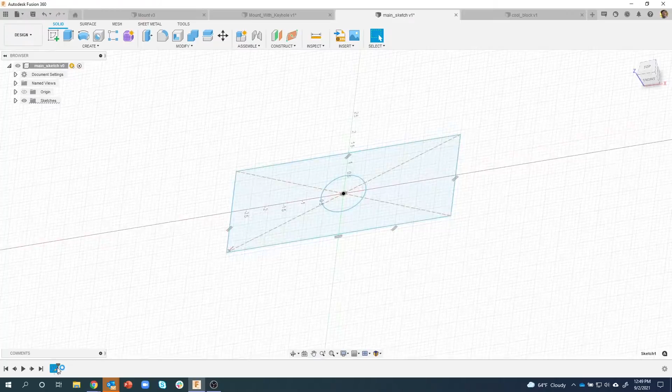Now I can come back to my main sketch over here and make a change to it, right? So I'll come in and edit this sketch. Maybe it looks more like this. Maybe the circle is bigger, and I save that guy. Or I could obviously type in dimensions and all that kind of stuff.

I'll come over to this cool block, and you'll notice I get the little warning saying things are out of date. So I'll go ahead and click on that, and it's going to actually use that sketch to make changes to my design. So it's not just models that you can derive. You can also do, for example, sketches.

So I got to thinking, maybe you do a lot of sheet metal stamping or something like that. You could have these stamps as sketches, right? And you save those and you derive those into your design. And then maybe you decide, okay, those slots that we made need to be a little bit larger. So you go back and you update that sketch. And then those derived parts will update also, instead of having to recreate a pattern, change dimensions and sketches, etc. So kind of think about how you could go about using this.

So I'm going to pause for a second, take a look. Hopefully Jason was able to answer a lot of the questions. Okay, yeah, it looks like he has been. So thank you, Jason, very much for doing that.

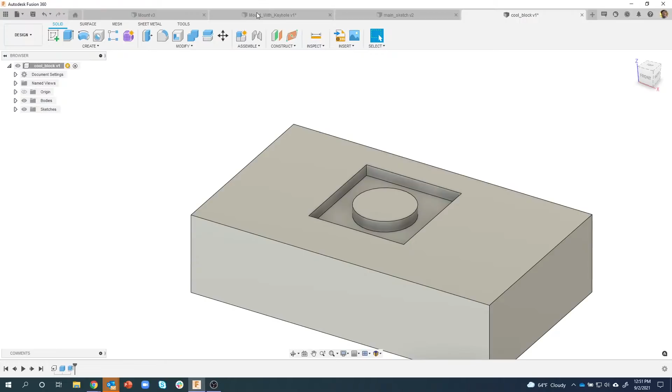Okay, so somebody asked, in which direction do you suggest to 3D print the derived part with the big void? I'm assuming you're talking about this part here. So I'll show you, this obviously I printed face down, so this was on the bed. And this I actually printed the exact same way, that was on the bed. And I just had support material in here.

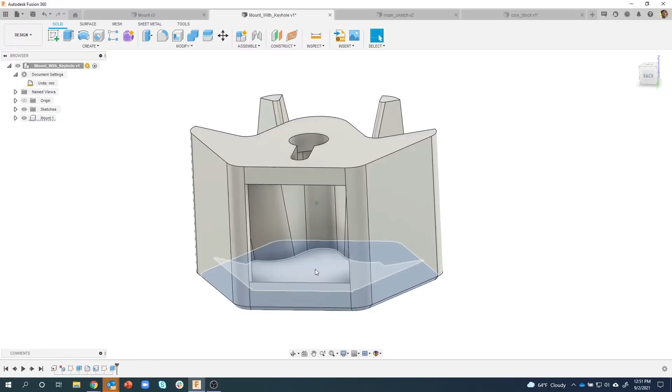Now I have my 3D printer dialed in pretty darn good with support material that I was able to pull out of there. I doubt my camera is going to focus very good. So you can see there's a little bit of a rough surface in there, but it's quite smooth inside. So spend some time playing around with the support material settings, and you'll get some that literally just pulled right out. So yeah, is there a better direction?

I don't know. I ended up printing it the exact same way because I wanted this face to be really smooth, because that's what's visible, because this is against the wall and then this is what's visible. So, oops, I'm looking at the camera and not showing, sorry. So I wanted this face to be very smooth. So obviously I put that on the bed. And then this is the face that goes against the wall. So good question.